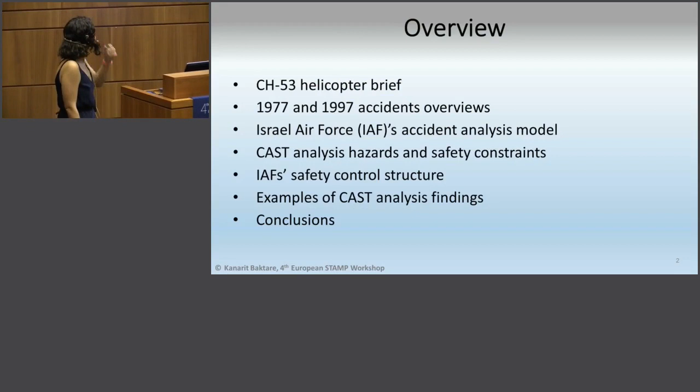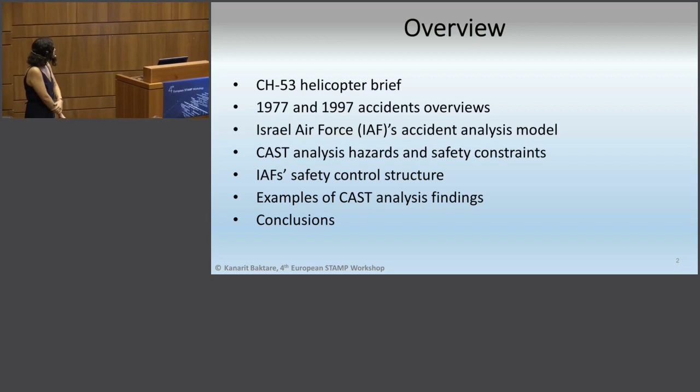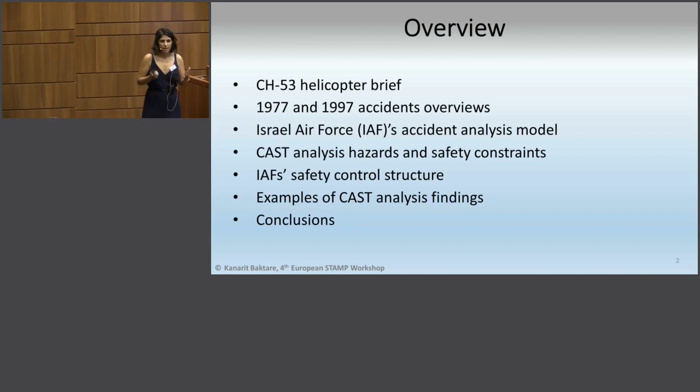Overview briefly of what I'm going to talk about in this lecture: a helicopter brief to let you understand exactly what the CH-53 is and its complexity; then I'll present the accidents themselves; the Israeli Air Force accident analysis model, what the Israeli Air Force found in their investigation, CAST analysis of hazard and safety constraints, the IAF safety control structure, which will be very interesting, and of course an example of the CAST findings, and a comparison between the two.

Now, helicopter brief. The CH-53 is a utility aircraft used for evacuation, rescue and evac, that's what the helicopter does. In service in the IAF since 1969, it's one of the oldest vehicles we have. All the Israeli models are CH-53A - we are the unique operator of the CH-53A - and CH-53D, which I think only the Germans have now. The US Navy operates the E model, which is completely different dynamically and electronically.

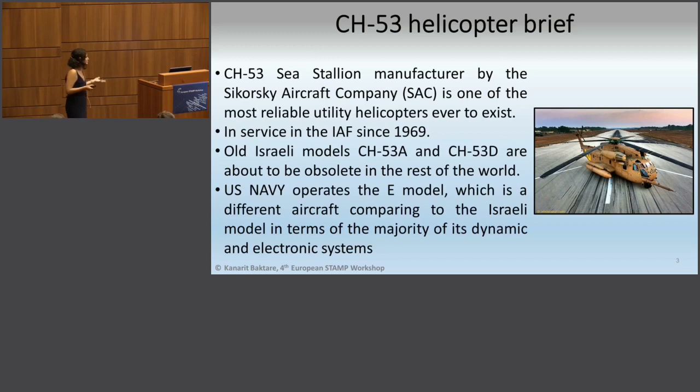So now that we're familiar with the CH-53, let's go to the 1977 accident. One of the aircraft, tail number 360, took off for a planned formation flying training. Formation flying training means you fly in a structure of 2, 3, or 4 aircraft in a basic structure. It can be like that when you are in 2, or it can be like that, or any other structure that you define at the beginning.

Now, one aircraft was grounded due to a mechanical problem, and the other 5 aircraft took off and left that aircraft at Mahanayim. The malfunction was repaired, and then it took off as a single one, which means we are no longer in formation flying, we're now on a single flight. At a height of 300 feet and speed of 80 knots, the aircraft crashed into a mountainside near Jericho. 54 soldiers and staff were killed.

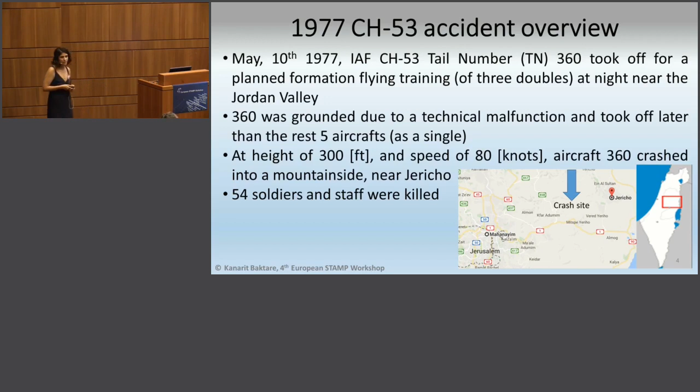Now, what the IAF found... okay, for some reason one of the slides is missing. Okay, let's talk about the Mishap Investigation Board findings.

They classified it as pilot error. The pilot was wrong, he flew at low altitude with sight limits because of the darkness of the night. The squadron commander told them to fly at low altitude, and it was wrong. Wrong debrief, again fly at the lowest altitude - again human being, human being, human being. These are all 7 conclusions of the Mishap Investigation Commission: a wrong datum point mark on the map, and no update of engine performance graphs.

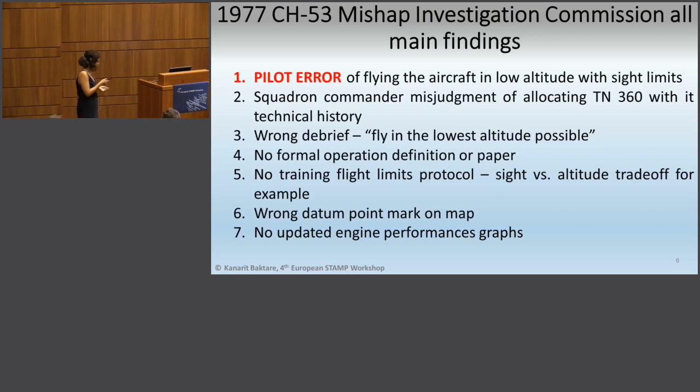Now let's go to the 1997 accident. On February 3rd, 1997, two CH-53s had an operational transport mission to transfer soldiers to their post from Israel to Lebanon. On February 3rd, it was actually cancelled because of weather conditions. Then, on February 4th, these two aircraft took off in order to take those soldiers to their posts because the weather became clear.

They flew to Mahanayim Airport, which is near the border of Lebanon. Eight minutes after departure, one aircraft's tail rotor hit the second one's main rotor. They flew in formation, and aircraft 903 took a turn into its tail rotor. Both aircraft crashed, and 73 soldiers were killed. It was the largest disaster on helicopter history ever by that year.

By this year - until 2003, I think - when the US Army broke it in Afghanistan.

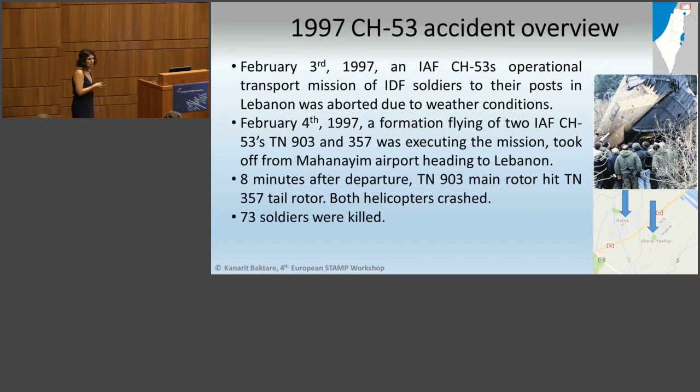Now, the 1997 governmental mishap investigation actually classified the accident the same way as the 1977 one: pilot error, it was mistaken. It took the left turn and it didn't have to. Both pilots were not qualified as formation flying leaders, and yet they took a formation flying mission.

Night vision device limited the sight area, as you can see here. The sight area when you use a night vision device is quite limited, and you cannot see a lot of your environment, and it was a contributing factor. Also, both aircraft's takeoff weight had reached the maximum limit.

No CVR, no weather condition issue, no behavioral sign, no signs of competition that the behavioral analysis can tell anything about it. No evidence of technical malfunction, just a pilot error.

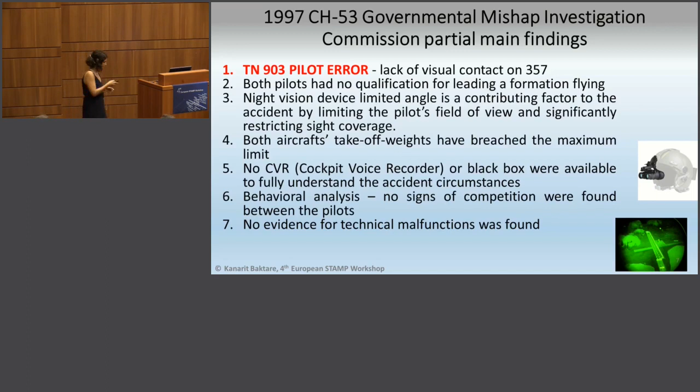Because there was no CVR, no black box on those helicopters, no one knew exactly what happened on this accident. So they took all the investigation findings to NASA and tried to simulate the accident, what happened one minute before it happened.

This is a simulation that I did using the information on MIG's report. So, one minute before the accident, both aircraft actually flew in formation flying, one after the other, as they used to.

50 seconds before the accident - this is an important issue I'll touch on later - they had to do something called a mutual light inspection, which means you have to make sure, before you go into a hostile environment, your lights are off, meaning you have to check the other aircraft's lights are off.

So the 357, which was the aft aircraft in the formation, went to fly parallel to 903. So they looked like that.

30 seconds before the accident, 357 accelerates in order that 903 can see his lights are off. So they are looking like that.

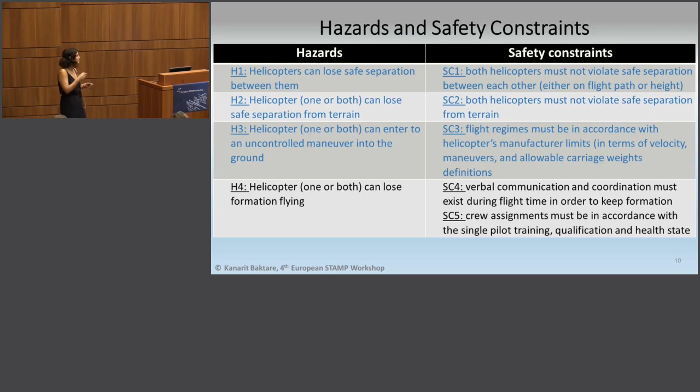A second thing is that crew assignment must be in accordance with the pilot's qualification and health state. Let's see what happened when you try to analyze it using CAST.

Probably you don't see anything because it's a very complex safety control structure, but what we have to understand is that the management level consists of all the headquarters, the IAF headquarters and the IDF headquarters. Another thing we can see here is that we have a development factor.

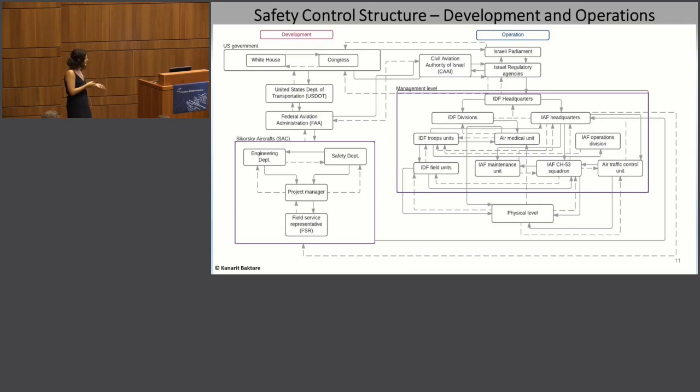Which is part of what the IAF does each and every day, which is Sikorsky. Sikorsky tells us exactly how to operate the helicopter, which means we have to follow what they say.

Now, if we break it down to the management level, you can see here the IAF headquarters, IDF headquarters, IDF division - IDF is the Israeli Defense Forces, what you call the troops, IAF is the Israeli Air Force - IAF divisions, IDF field units, the IAF field units, and we're going to get back to them later on today.

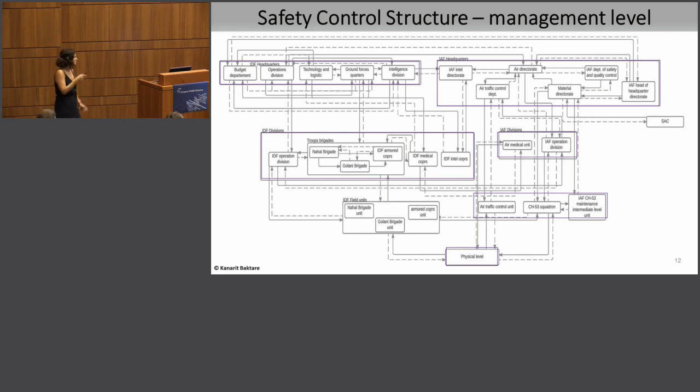And the physical level, which is this one. What is the physical level? Both aircraft, of course. On the 1997 accident - on the 1977 you only have one - but it looks the same.

Tail number 903, you have the pilot, co-pilot, and airborne mechanics, two of them at each aircraft. Airborne mechanics is the flight engineers in the Army. That's the same.

Panels, flight controllers, autopilot and pilot control, same as the CAST structure you just mentioned earlier today, and the aircraft position.

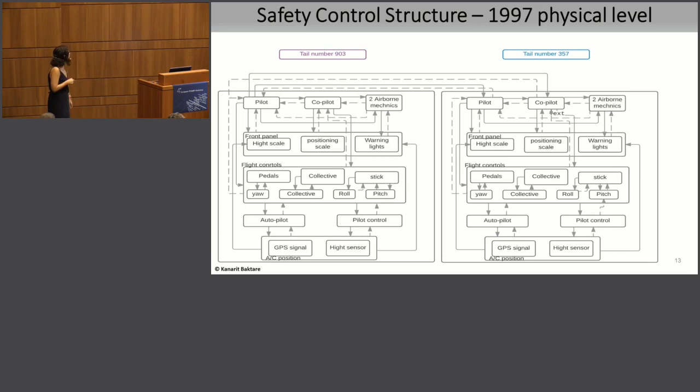Now, let's talk about the examples of the CAST findings that I found, which are not exactly findings, but a lot of questions, because they don't have details - not because it's classified, but because it was never investigated.

Now, let's talk about the night vision device that I told you limits the sight area. These are the hazards related to this machine. The first one is that the helicopters can lose safe distance between them, and of course it can lead to uncontrolled maneuver because you have a sight limit.

Now, what are the three options that happen here? The first one, what you can see here, is a zoom in of the hierarchical level, or the constraint that got broken during the analysis.

The first one is that the pilots were not aware of this inherent night sight device limit of 40 degrees. The second one is that apparently the pilots never complained about it - they were never trained to use these night devices and to actually train its limits. The third one is that the pilot complained, but no action was taken. So if you look over the structure, you can see that something is wrong here, here, here, or in the end.

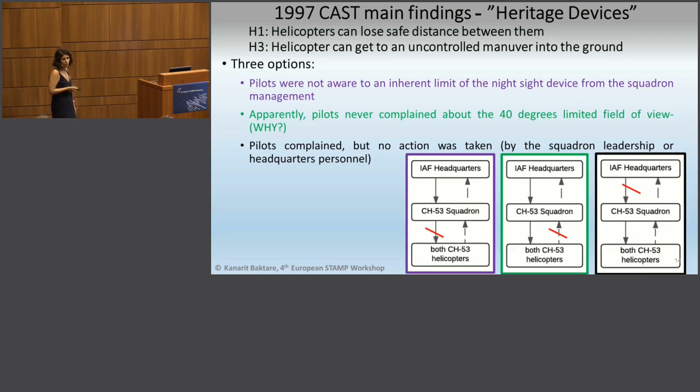Now, the second thing is that matter of training and allocation. Let's talk about the context for a second. The context is that the mission comes above safety. We're talking military, okay? It's the mission and then safety. Now, when you look over the context, you can see three things that went wrong and were never investigated.

The first thing is that the squadron leadership encouraged the pilot to fly at low altitude with sight limits. Why is that? Regardless that it was night, there were environmental conditions and everything, there was no defined training procedure to fly at low altitude. And we're talking about 1977, of course. Squadron personnel did not report the technical issue that they had. Who knew about it? You cannot allocate an aircraft with a technical issue to such a mission.

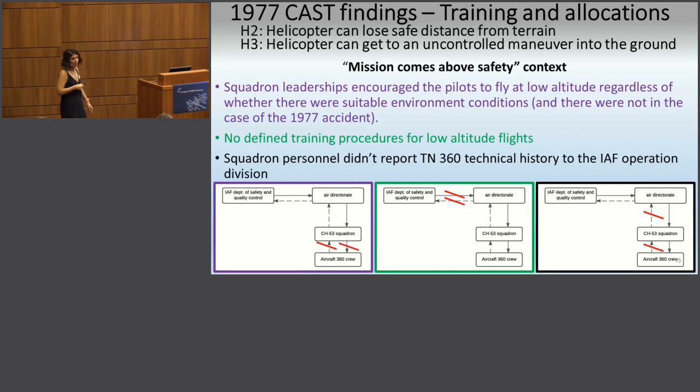Now, the colors in here show exactly what got broken inside the structure, and you can see it's a lot.

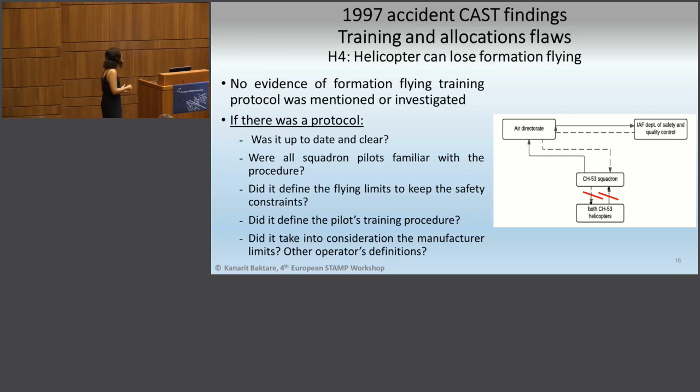Third thing about training and allocation is that you allocated pilots that were not trained to be a formation flying leader. How come? They never trained formation flying. So there's no evidence that even the training protocol was mentioned or investigated inside the report. So if there was a protocol, there's a serious series of questions that no one asked. Second thing, if there was no protocol, how does the IAF define formation flying?

It's a big question. How can you take a mission and tell your pilots you're going to a formation flying mission without even knowing what that is? And the second thing, was it even raised from the squadron management? We have a problem on the management level of the structure.

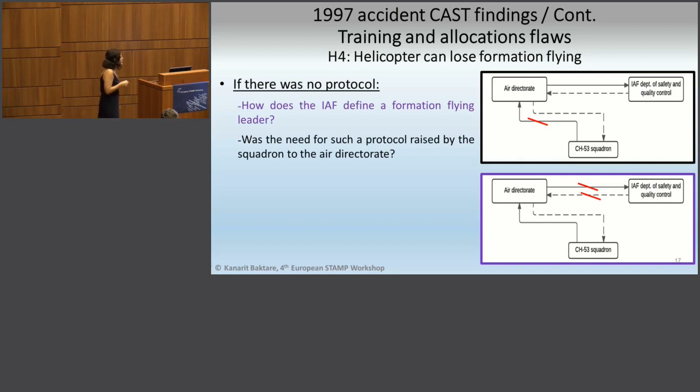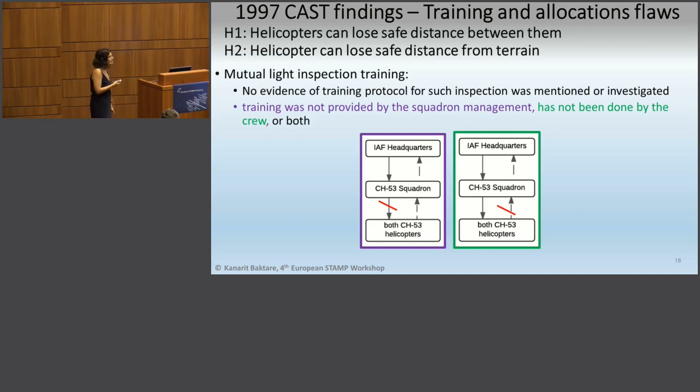Fourth thing is that mutual light inspection I mentioned before. No evidence of training protocol for such mutual light inspection. How come? So the training was not provided to the pilots, and they had never done it before, and they didn't know exactly what to do. And maybe this is the reason why they crashed.

About crew exchange. During the malfunction that I told you about on the 1977 accident, we actually had a crew exchange. They changed the pilot, the co-pilot, and the airborne crew. So what I asked myself, because again I had no information to know this for sure, was the crew exchange approved by the squadron? Because it had to be. The management had to know about it.

And was it even reported? Did someone report it? Did the new crew participate in the debrief? Not sure. Did the new crew have, again, a formation flying leader qualification? Not sure.

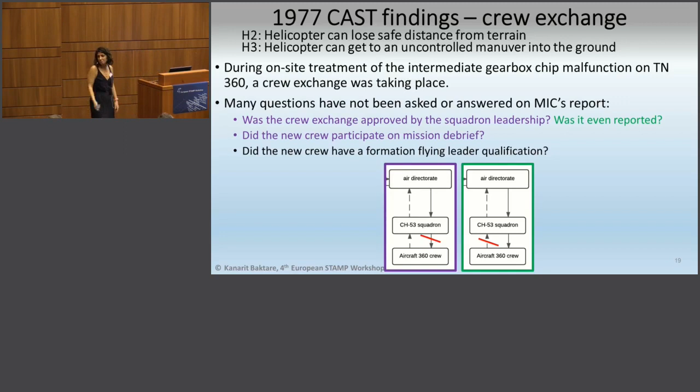The sixth thing, and the last one, is flight direction. If you remember, one of the findings was that the datum point on the map was not right. So how come all 5 other aircraft flew to the north, and this specific aircraft flew to the east-south? Where was the air traffic control unit and tower? They had to warn the pilots. Why was there no warning sent to the aircraft?

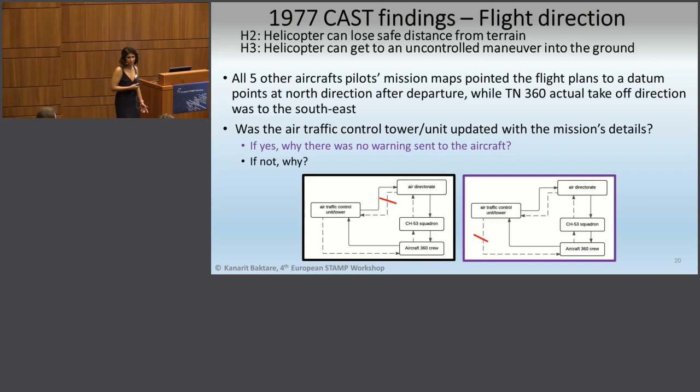And this is a continuation of that — did the pilot contact the tower to tell them exactly where they were? Because if not, how did the tower know that they flew in the wrong direction?

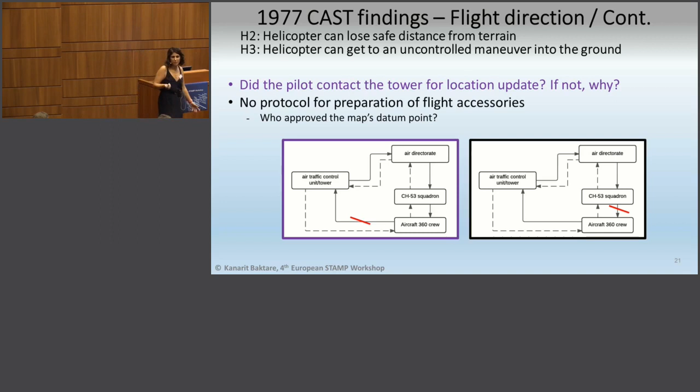There was no protocol for preparation of flight accessories. The map is a flight accessory. Who prepared it? Who approved it? These questions were never asked or investigated — there's no information about it, and again, not because it's classified.

Now, in comparison with the Mishap Investigation Commission report, you can see here a summary of the examples I just gave you. On the 1977 accident, the flight direction thing has no reference. The night vision issue was classified as a contributing factor with no inspection or even checking whether there is or isn't a protocol. On both accidents, improper training and a systematic mission-above-safety context were never investigated. Now, there's no reference, no behavioral analysis, no reference to safety protocol.

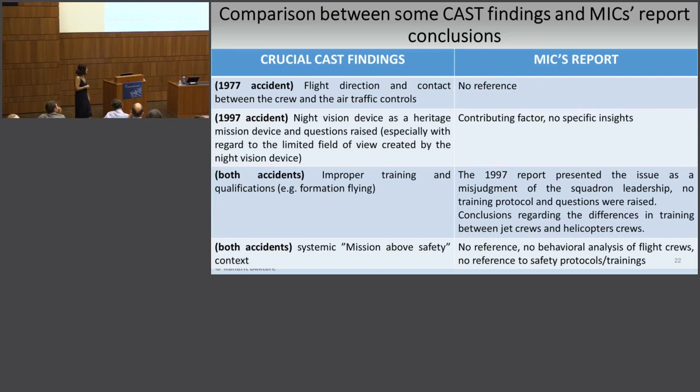The safety culture was changed during this 20-year period between the 1997 accident and today, but it lived between the period of both accidents. Basic non-routine procedures are missing.

Formation flying—I don't know if they have a definition for that even today. The structure of the IAF Air Directorate and Material Directorate is an Achilles heel in the structure. It possesses too many spans of control, and it contains too many feedback loops, which means you cannot control it.

You have to do something with your structure. They did something with the Air Directorate, nothing with the Material Directorate. The IAF risk analysis is still using the Swiss cheese or the linear cause and effect models to investigate accidents.

Nothing changed regarding active communication between the IAF and the Israeli Aviation Authority. Actually, the IAF is a single authority on military aircraft and military missions, and it still is.

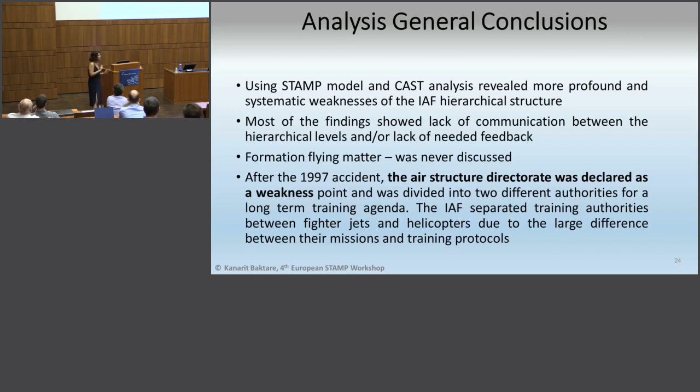After the 1997 accident, the Air Directorate structure was declared as a weakness, and it was divided into two separate directorates—the Helicopter Directorate and the Air Directorate, which does only training of fighter jets. And this is all they do for the long training agenda.

Now, I will present this presentation, as you see here, to the IAF commanders. Hopefully something will change there. And that's all. Thank you very much for your attention.

Okay, very good. Thank you. Yep, you didn't mess it up, I don't think. That was excellent. Questions?

I have a... Yeah, there's a question up there. Yeah, you go first. You go first. Yeah, have to keep it.

So thank you for the great presentation. I really like that. To me, this presentation showed a huge difference to the other presentations, being a little bit atypical. So the huge impact of the organization and the human structure, or how you structure organizations in the whole matter.

How to operate the system, explaining why systems are socio-technical, in fact. So from the methodology side, would you confirm my opinion that the better way to have such investigations taking place in future is making the CAST, taking the indicators, the causes, as a pattern to design the questionnaires for investigating the truth behind, or the facts behind what happened there?